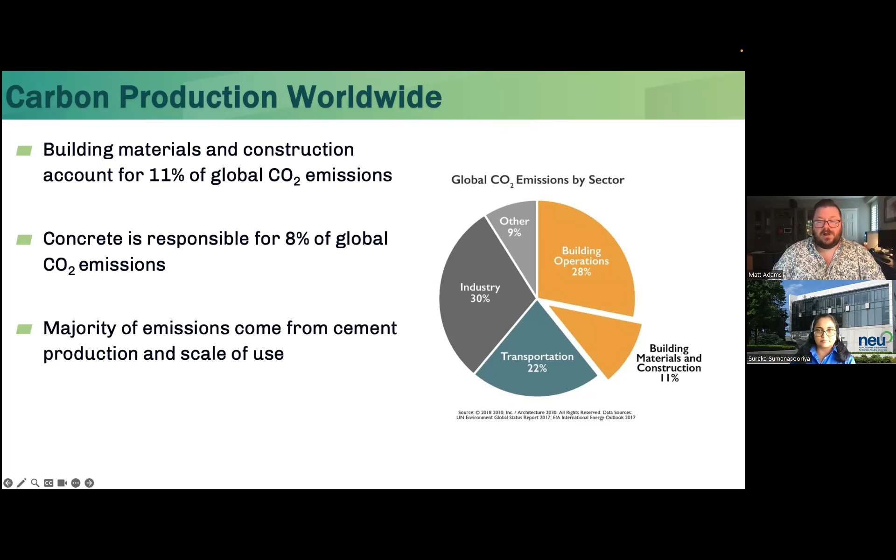So if we take a look, even though concrete's 8% of that total carbon emissions, in terms of relationships to other building materials, concrete has a relatively low embodied carbon on a per unit basis. It's much lower than some of our other building materials. With that being the case, oftentimes I get asked the question, why are we so concerned about concrete?

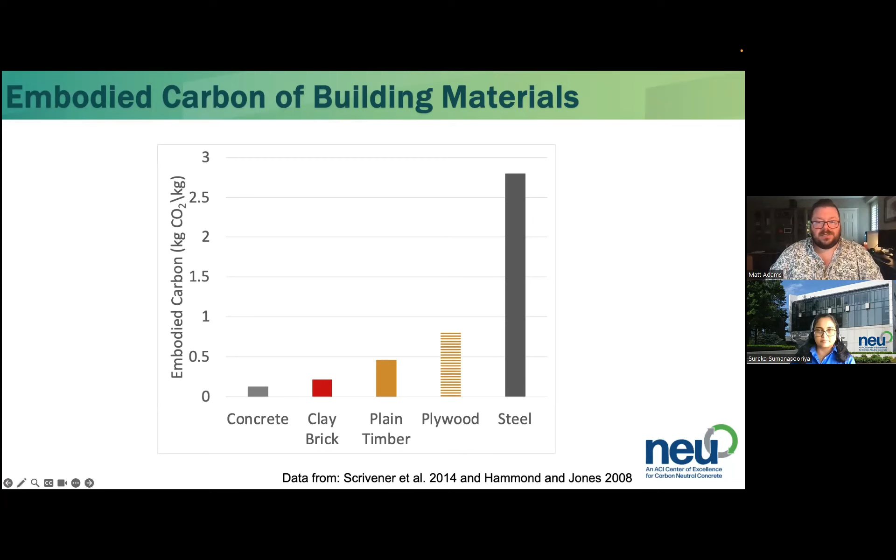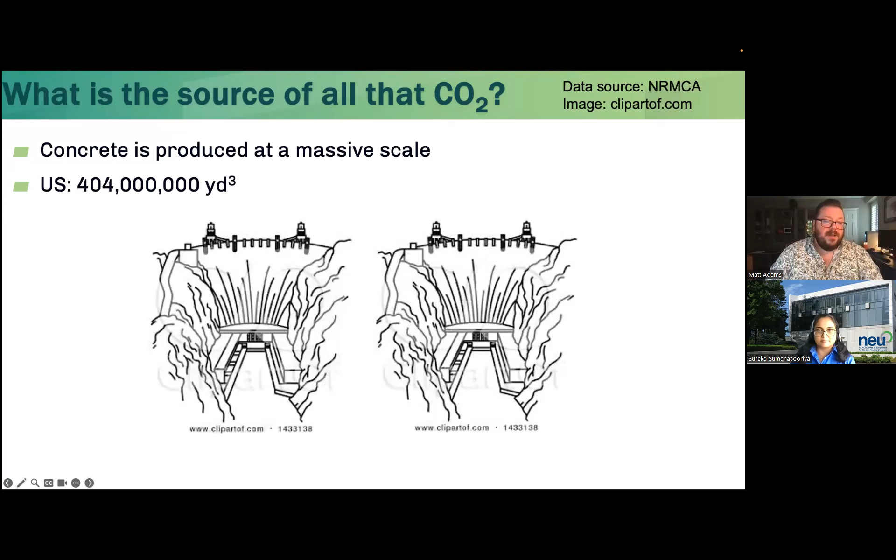Well, we produce concrete at a massive scale, much more massive than anything else that we produce in the world. In the US, we make over 400 million cubic yards of it a year. Just to put that into context, that is not one Hoover Dam, it's not 2 Hoover Dams, it's not 10 Hoover Dams, it is 615 Hoover Dams. So that's a lot of Hoover Dams that we construct just in the US alone.

And the US is certainly not the country that is doing the most new construction in the world, right? So we are just a part of that number. Globally, it's a huge number, the amount of concrete that we make. And because of that, all of the carbon that is produced, even though it's relatively small on the per unit basis, it adds up pretty quickly.

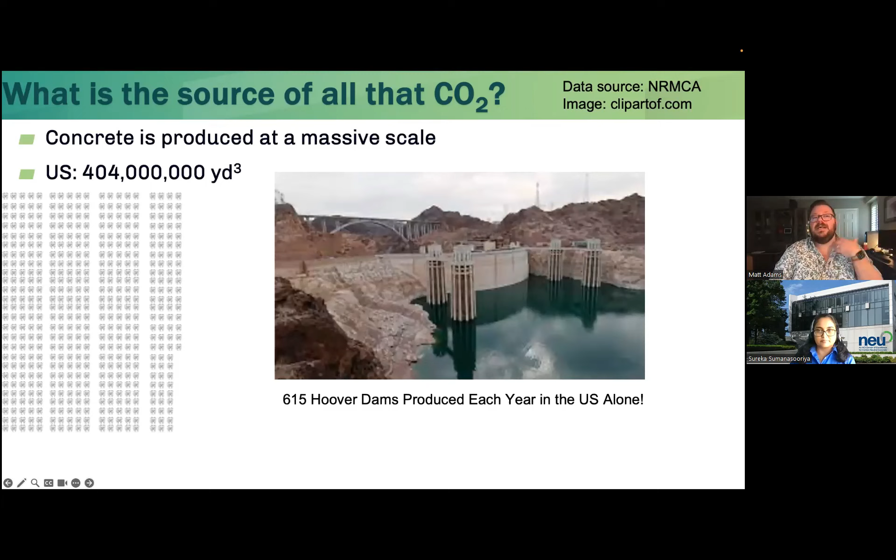So where's all of that carbon coming from? Greater than about 90% in most cases of the embodied carbon in a pure Portland cement mixture is really from the cement production.

This can be broken down into the quarrying, transport, and grinding processes, the process emissions, which are chemical emissions that come from the process of making the cement, and then thermal emissions, which are associated with burning the fuel to heat up the kiln for making cement.

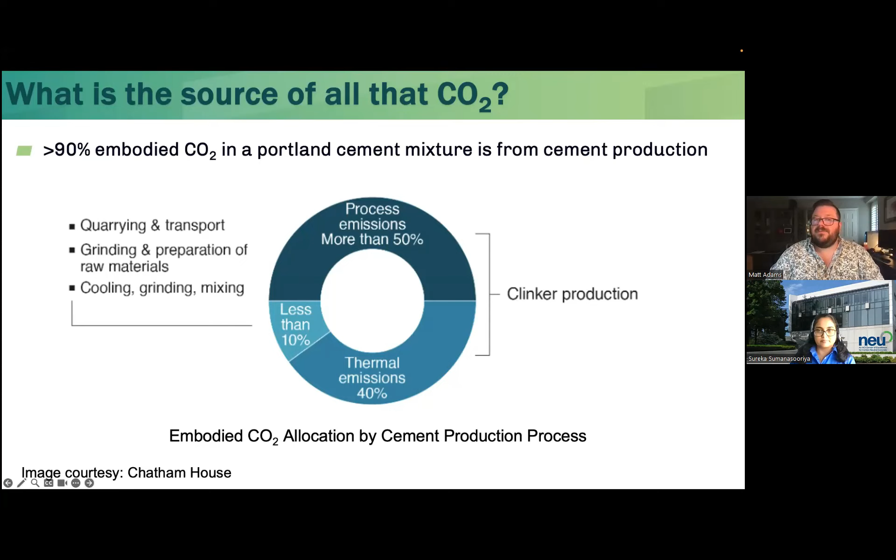You can see from this graph from Chatham House that more than 50% of the total CO2 we're producing when we make cement is coming from that chemical process. At the moment, it's not really avoidable.

If you're familiar with cement production, we make cement in a large rotating kiln, and we heat that cement up to about 1400 to 1500 degrees Celsius. At the end, we get clinker that we crush down with gypsum to form Portland cement. During that process, we release quite a bit of CO2.

First, about 40% is from the burning of the fuel source to heat the kiln. We've done a lot of work to make that more efficient, but at the end of the day you're still burning quite a bit of fossil fuels.

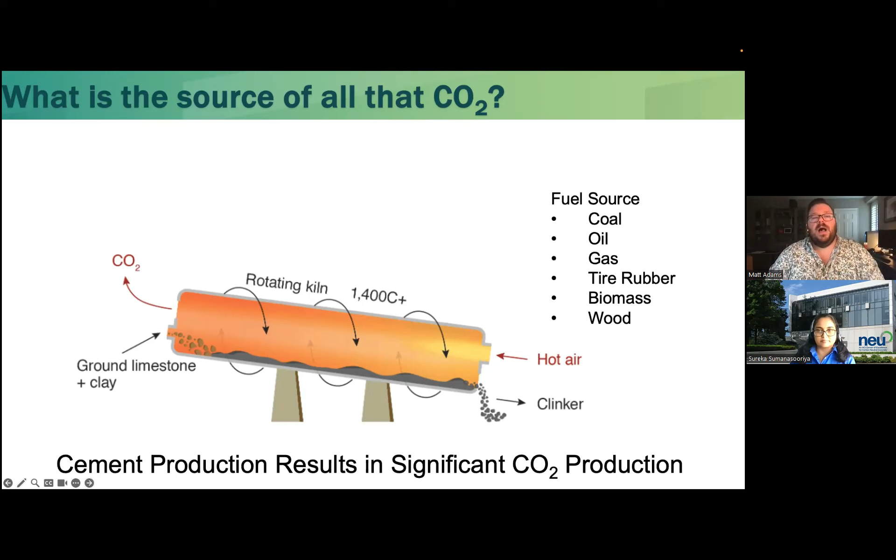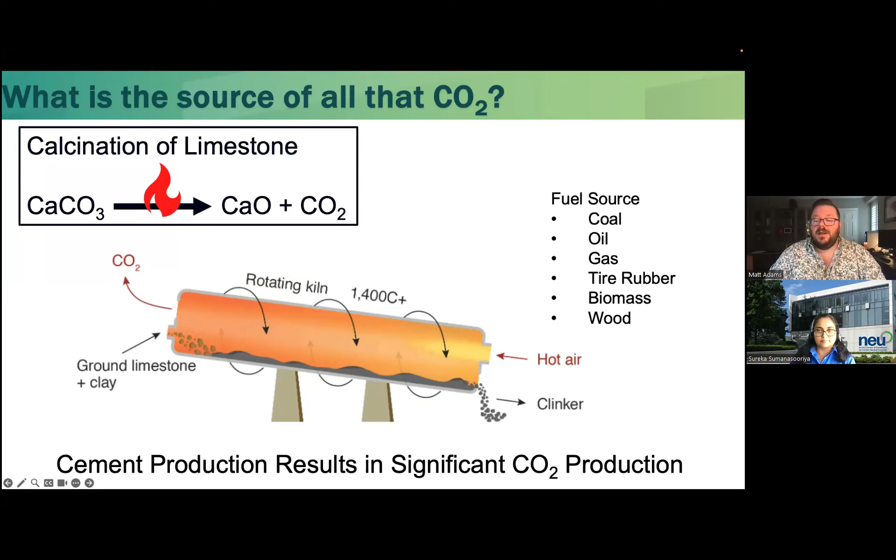But really the main source is from the calcination of the limestone. Limestone is a raw material we put in so that we can get calcium oxide, which is a main component of cement. When you burn that calcium carbonate, or the limestone, it drives off CO2 so you get the calcium oxide. Right now, in most cases, that CO2 is just being released to the atmosphere, and that is a huge source of CO2 coming from cement production.

There are a number of technologies for reducing the CO2 related to concrete. First are options for sequestering the CO2 into concrete, technologies like what is being sold by CarbonCure and Solidia, where you're actually putting CO2 into the concrete and locking it away. I'm not going to touch too much on that today.

You can reduce your total Portland cement content and your total cementitious materials content. We can try to reduce or capture CO2 production at the source. And then we can also try to minimize the carbon in our non-cementitious materials, so minimizing carbon associated with the aggregates and other processes in the concrete production process.

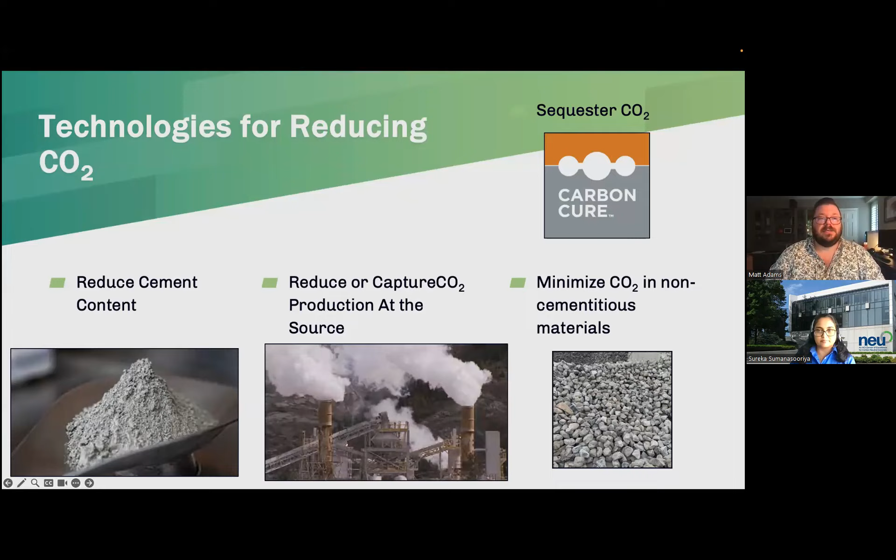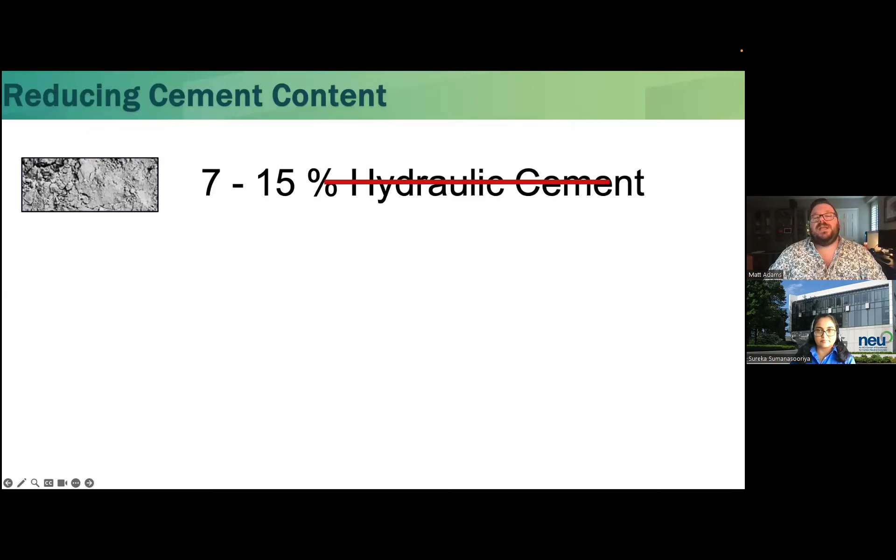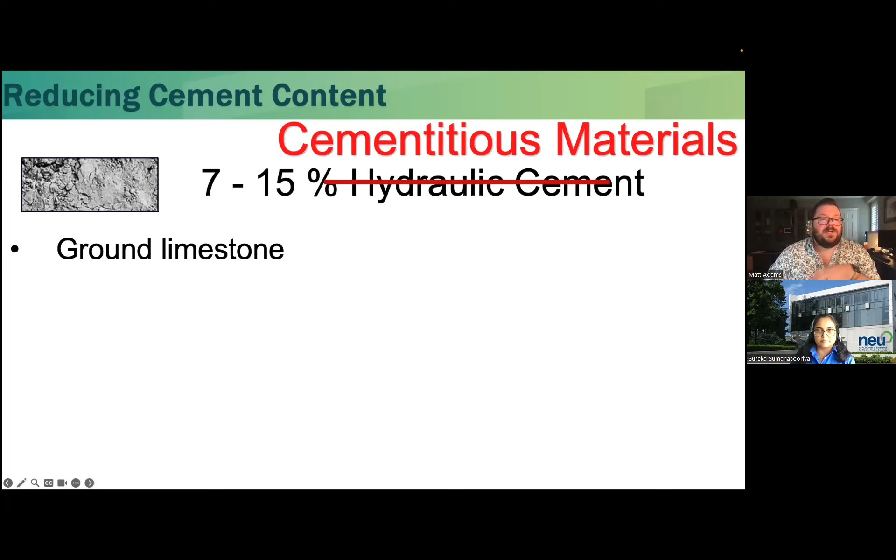So how do we reduce our cement content? The amount of cement in a concrete mixture is about 7 to 15%. If we can try to step away a bit from using all Portland cement, and think of it as total cementitious materials, we can start to include things with much lower embodied carbon, like ground limestone and common supplementary cementitious materials, though we know there are potential access issues for fly ash and slag on the horizon.

And then we have newer SCMs coming onto the market, like ground glass pozzolans and calcined clays. Not going to get too deep into what these are, but there are many options for trying to reduce the total amount of cement in your system.

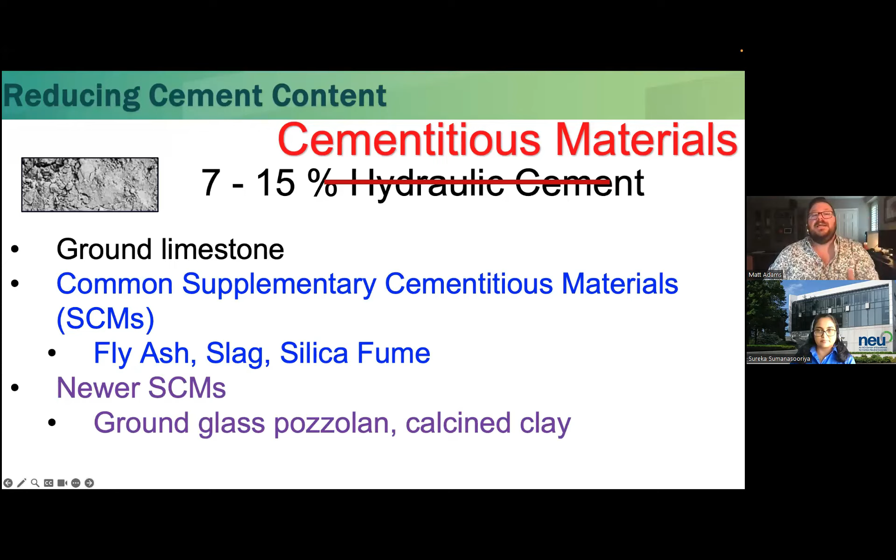We can also try to reduce overall cement content by improving aggregate gradation. Essentially, packing more aggregates into the space means you have to fill less of that space with cement. This is still a technology being developed in terms of the best way to calculate that packing, how you actually blend your aggregates, what the cost associated with it is, and how concrete plants actually do this at scale.

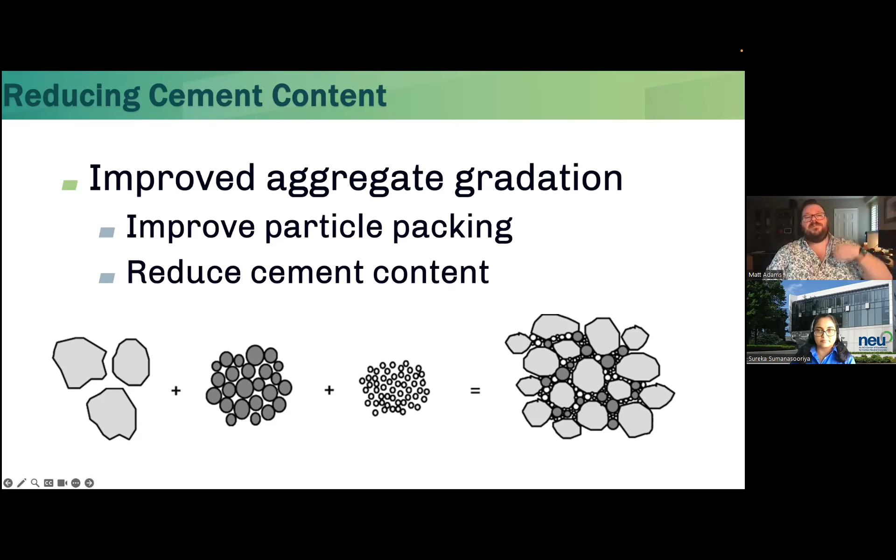Right now it's been done quite a bit in lab scale, but getting the concrete plants up to the next level is kind of another stage.

But really the most important thing for us is not to over design our concrete. Concrete strength is not a strongman competition, it's not about who is the strongest and the best. It's about making the concrete that you need for your particular application. We know that we can dump lots of cement into a system and get pretty high strengths, get higher early strengths with that, but we don't really need that.

You can get great strengths with more careful design. You can get everyday strength, 4,000, 5,000 PSI, with fairly low cement contents. So just trying to be more cognizant of the way we design our systems will really help.

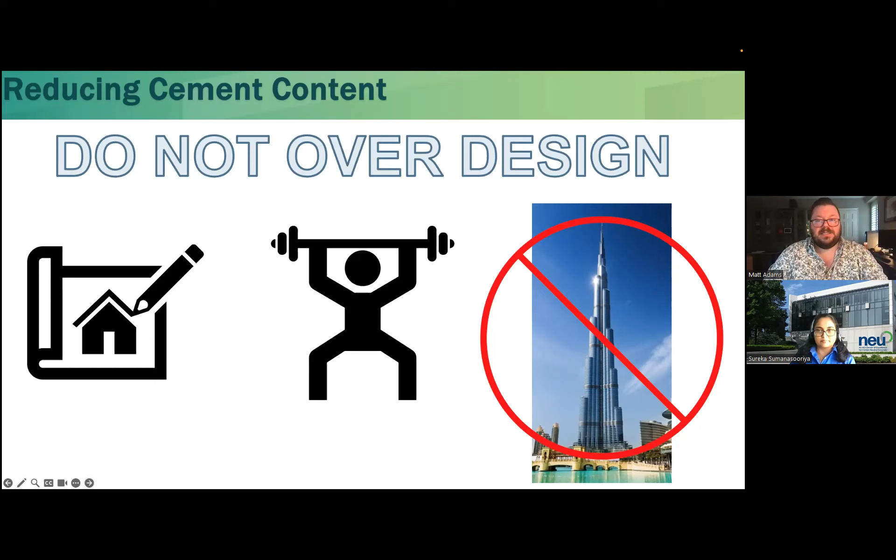Another tool being examined is reducing or capturing CO2 at the source. Modern cement plants are pretty efficient in terms of energy efficiency, heat capture, et cetera. There's always improvements to be made, but we've done a lot of work in that space.

But in terms of trying to capture the CO2 coming out of the kiln, particularly from the breakdown of the limestone, there are technologies in development, but likely retrofitting plants is going to be incredibly costly, and that cost will get passed down to the consumer in some way. So there's a limitation to how much that can happen based on how much people are willing to pay for the cement.

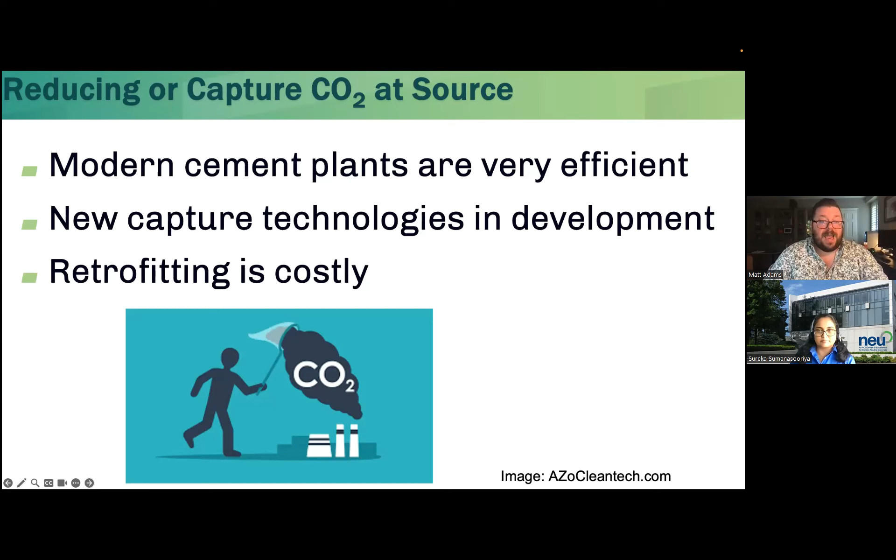You can try to minimize CO2 from other components such as the aggregate, but these have minimal impact on the overall CO2 in the system, because the amount of CO2 associated with making aggregates is relatively low in the first place. About 90% of the CO2 embodied in concrete is associated with the cement content, so focusing on how to reduce cement content and improve the other materials will get you better gains.

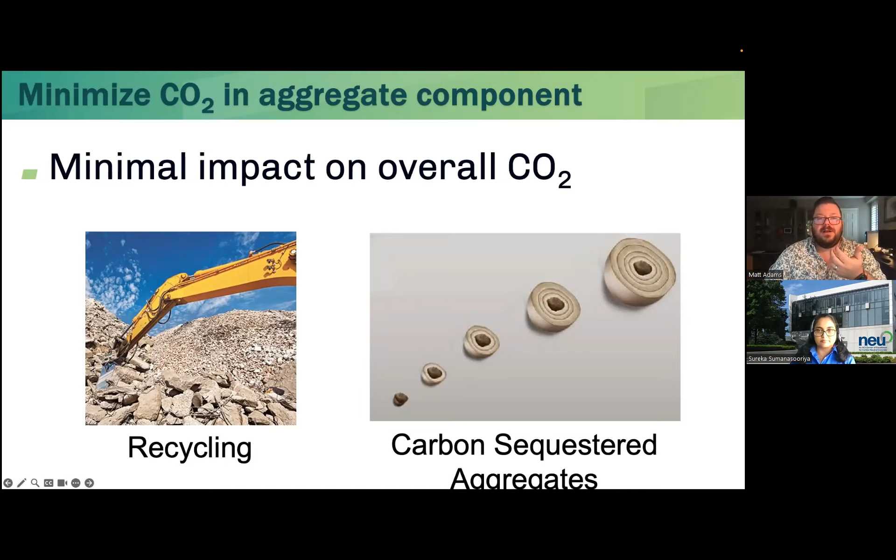So we have all of these technologies. What's the barrier to implementation? Why have we not used these more effectively?

First, there's always a fear of cost. Anytime we're looking at something new, people are worried about how much it's going to cost. Not everything that we do has an increased cost with it. Some of the technologies do have increased costs associated with them, but not all of them do, particularly ones we've been using for a while—the cost is really not significantly different. So we have the ability to make low carbon concrete without significantly increasing the cost, and this has been shown by many agencies that have started to use it.

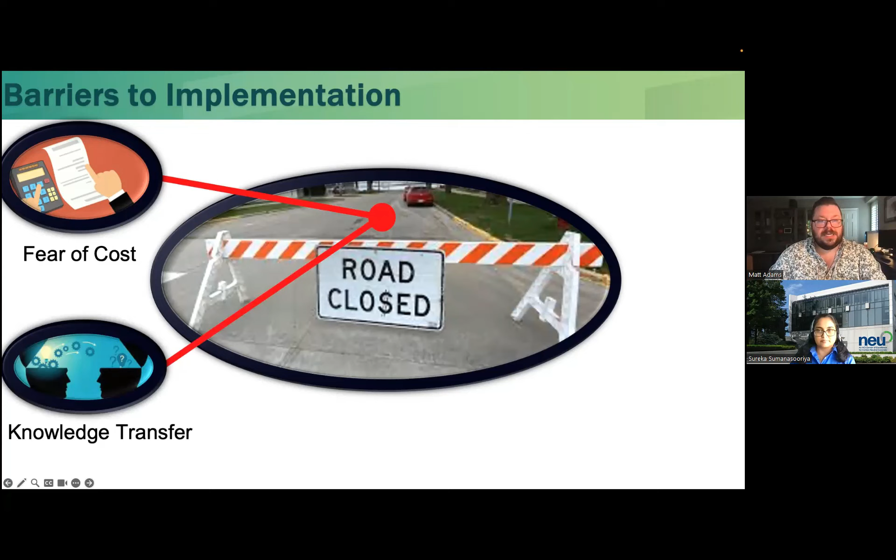We do have issues with knowledge transfer. A good example is a town in upstate New York that wanted to start using low carbon concrete, referring to it as green concrete. They went to their local concrete plant, and the plant said, 'Why would you want to dye your concrete green?' So there are these miscommunications and misinformation, and then there's just folks who don't have the base knowledge.

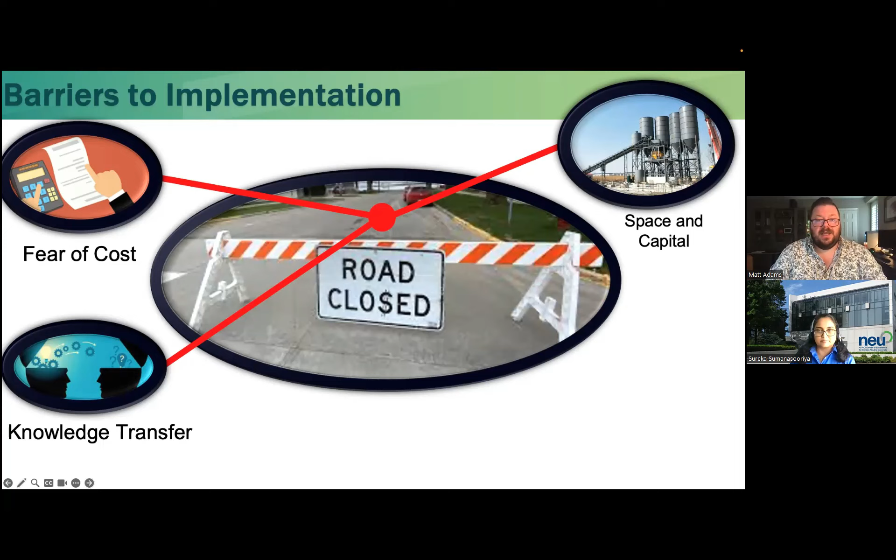ACI, NEU, educators—we can start to develop more easy to access knowledge transfer tools to get that information out. Space and capital at concrete plants is a real difficulty. A lot of concrete plants, particularly in urban environments, sit on very small parcels of land. So when you ask them to introduce new materials, it's not just about learning what that material can do and how to use it, but where do you put it? Do they have space for another silo of cementitious materials, or a third size range of aggregates? They don't always have that space, so we need to provide capital to expand or come up with new storage methods.

Liability is always a concern, particularly in construction when we're moving into new materials. For low carbon concrete, there isn't a lot of national level guidance—we don't have a national level model building code. So when it comes to best practices, contractors are often nervous to implement things because they don't have national level proven technologies to fall back on, and they don't want to take on the risk themselves in case something goes wrong.

And then political will is always an issue. Particularly for public projects, the rest of these issues can really be solved with political will and putting in the right policies and funding. You need legislators and policymakers who are interested in creating more sustainable concrete, but who are also willing to look at all these barriers holistically and figure out how to drive them—how to keep implementation costs off the contractors and concrete producers, and make it a real community effort. So those are some of the main barriers to implementation.

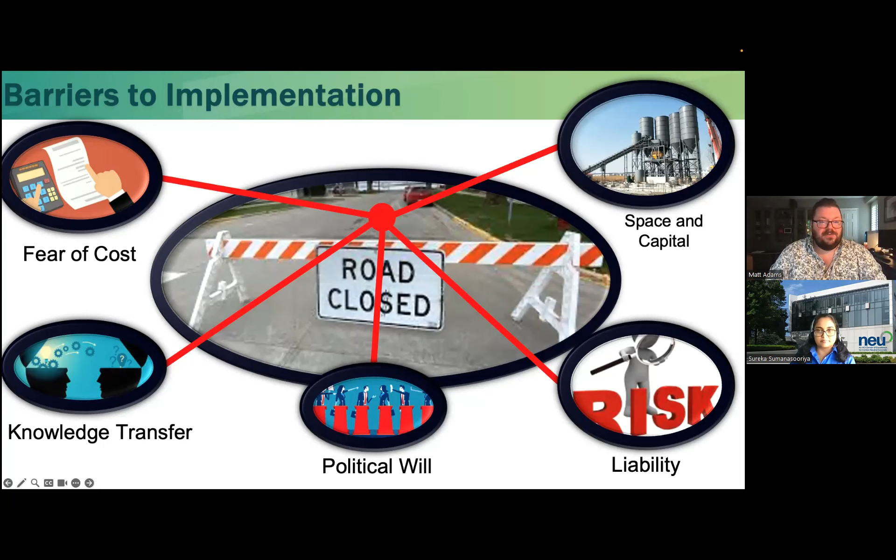We've seen a lot of policies start to get implemented around the country, some more successful than others. I want to take time to talk about each of the main policies that have been put out. This isn't all inclusive, since new stuff comes out every day from different jurisdictions, and it's difficult to keep tabs on all of it. But some of the first policy came out—and I'll start by saying good policy can save the world, bad policy is just ineffective. We saw a lot of policy work start at the local and state level, really with a lot of non-mandatory resolutions.

So when you're talking about a resolution, it's usually some legislative group standing up and essentially making a statement, saying we think this should happen, but there's no requirement behind it. There's no enforcement, there's no incentives. It's just, hey, we think you should do this.

Some of the first low carbon concrete policies that came out really focused on promoting the use of carbon storage in concrete, so the use of things like CarbonCure or Solidia, et cetera. The first few that came out were from the state of Hawaii, the city of Austin, and the US Conference of Mayors also made a resolution on this. These policies were really mainly pushed and lobbied for by some of the private companies.

The resolutions weren't bad necessarily, they just didn't really have any teeth to them, so they didn't really get that effective. And for a lot of these technologies, you really need special equipment, so even if a city says we want this, was it available nearby? That was a problem. This is where we really start to see that these resolutions are good-natured, kind of get people interested in the idea, but they're really not moving us forward.

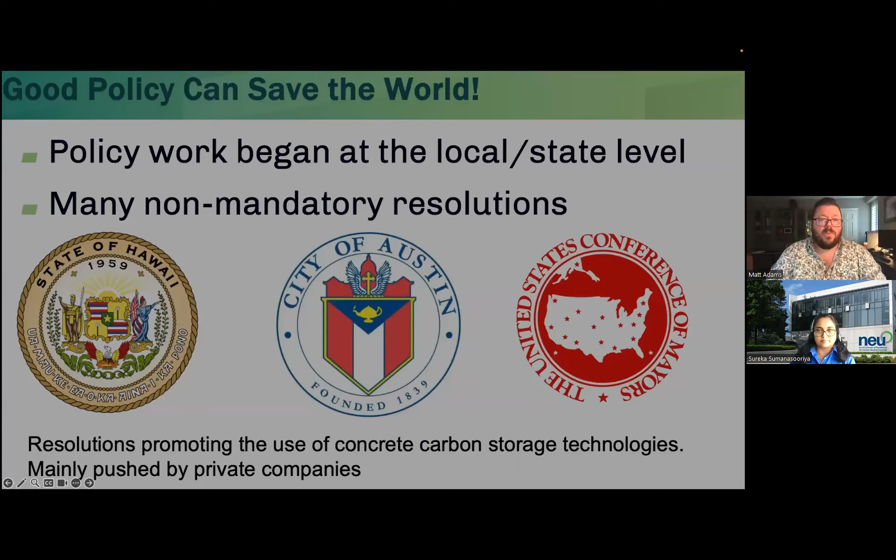There were some resolutions that were taken that were very successful. One example is one that was put together by the village of Hastings-on-Hudson. If you're unfamiliar with New York sort of jurisdictions, villages are basically sub-city level government, so the village of Hastings is part of a larger city area up in upstate New York. They put together a resolution that ended up being very effective.

They were able to have a lot of projects come out of this that have utilized lower carbon concrete systems, starting at the very small scale with probably a 25-foot long retaining wall - that was their pilot project. They've now scaled up. They have it in an elementary school, they did a massive sidewalk project, and basically all new concrete being put in the city is following low carbon concrete technologies.

It's also expanded out of Hastings to most of the surrounding villages and towns, and starting to get traction through a broader region within New York. This resolution was pretty, we would say, successful because it had the impact of accomplishing the goal of having more low carbon concrete, not just in that town, but in the area.

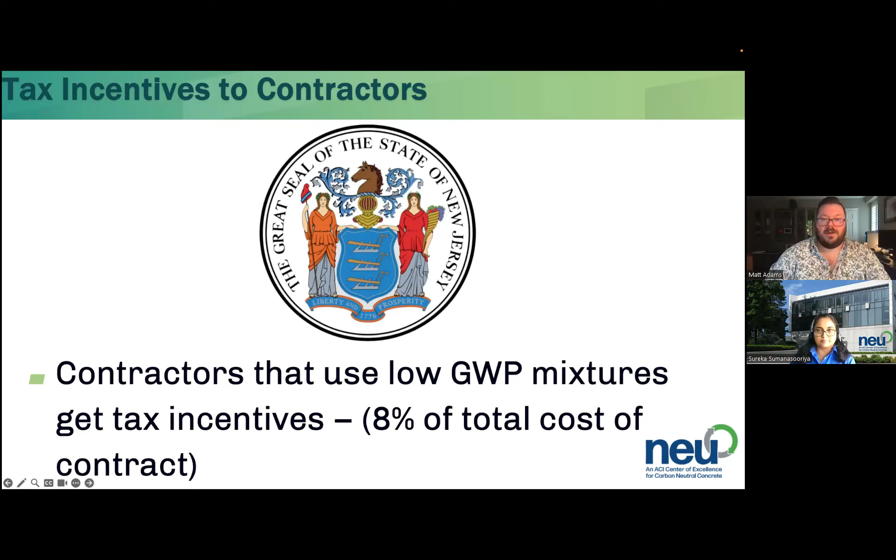The next ones are really starting to set limits on the total global warming potential allowed in embodied carbon concrete, and also limits on the total amount of Portland cement in a system. The first group to really implement this was Marin County in California, just north of San Francisco. For all public concrete projects in unincorporated areas of Marin County, they have limits on either the total cement content or the total global warming potential.

Those limits are based on concrete strength—the stronger the concrete, the higher the allowance of cement or global warming potential. Port Authority of New York and New Jersey also just released a new specification that both limits cement content and requires calculations of GWP. Those limits were really based on internal studies of global warming potential.

For Marin County, they did a study of concrete made locally, determined the global warming potential of that, and set their limits based on that. For Port Authority, their limits were set based on their own internal data. They came up with what those limits could be, what they felt was going to be achievable. And now those are requirements for all concrete in those jurisdictions.

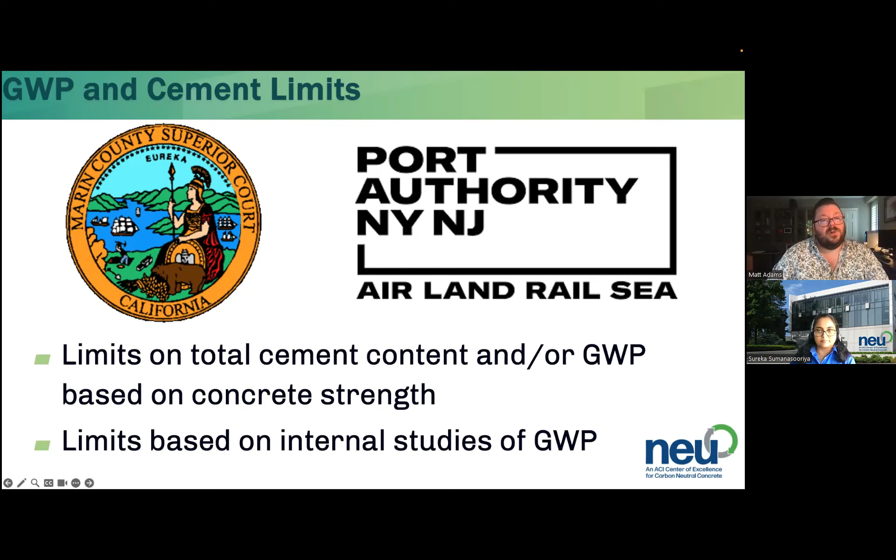The state of New York just released their new limits—I believe it was on Tuesday that they released this information. They're following similar ideas to Marin County and the Port Authority, limiting the total global warming potential based on the strength of the concrete. The limit they've chosen is 150% of the NRMCA regional average concrete global warming potential for the Northeast region. If you're unfamiliar, the National Ready Mixed Concrete Association has come up with averages for global warming potential for concrete based on regional averages in the US. This is a really great benchmarking tool that they have developed.

There are some limitations to it. The data, while very good, is somewhat limited. So while this is a great start, we have a lot of work to do in this area of trying to really determine what those benchmarks, what those baselines should be. What is out right now is kind of a first pass, based off of limited data sets.

In the world of concrete, we do have what I like to refer to as a data problem, in that it's not that we have too much data, it's that we really don't have enough well-organized and easily accessible data. So we need to really step up in the community in data sharing so that we can get really good answers and information.

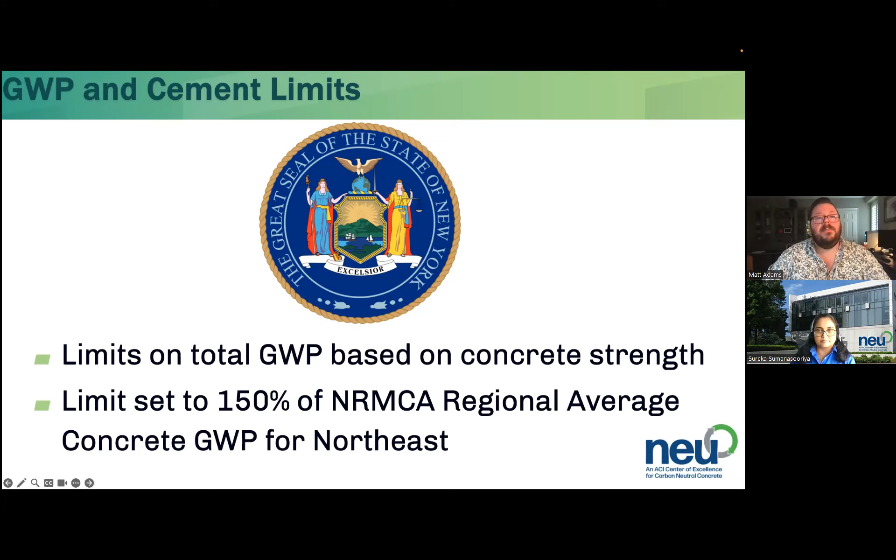How do you actually calculate your GWP? What limits should you use? What makes a low carbon building material hasn't really been determined yet. So there's still a lot of work to be done there, but that is coming, and they are in the process of figuring that out.

And so what all of this comes down to is that there has been a lot of policy put together, and it's kind of all over the place. There's different ways of calculating the GWP. There's different benchmarks that have been set. There's been different limits that have been set. There's been different ways to incentivize the use of the material.

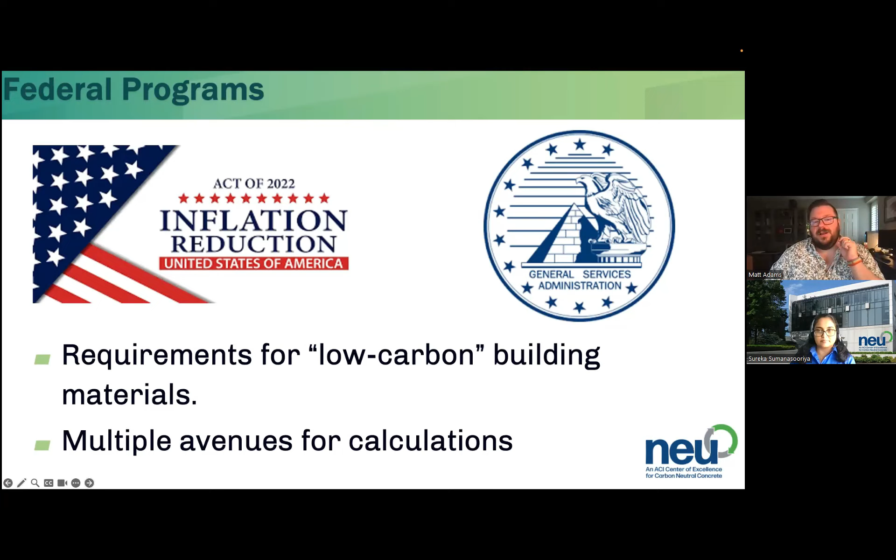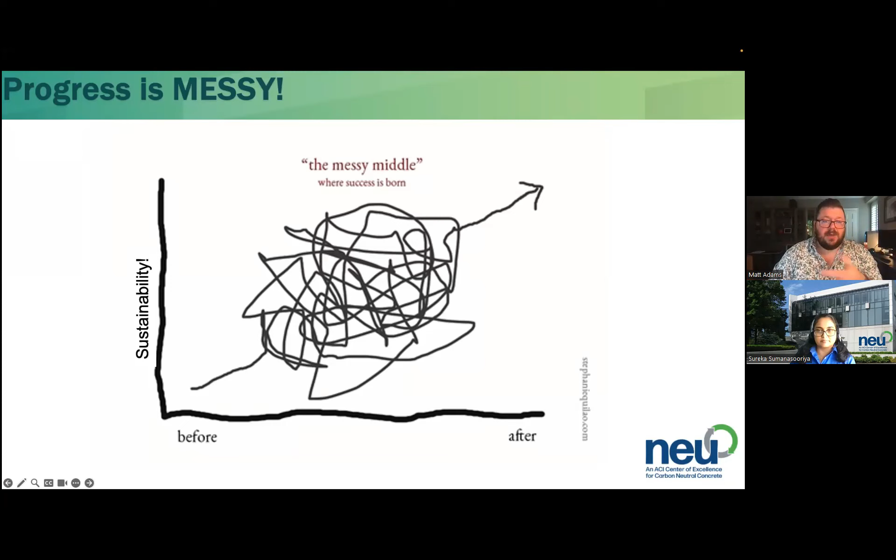And so out of this, we are at a point where we really need to develop national level building code and national level model building code language and tools for getting us to low carbon concrete that jurisdictions can adopt, and we can have a consistent way of calculating global warming potential and calculating limits across the US and really around the world. So that national level model code guidance is needed.

There's a few things that we really need to sort of decide. How do you determine the global warming potential of the concrete of your building? What are the best practices there? What's the best way to do this? How do you calculate it? What limits do we set? What should be the limit on the global warming potential? What benchmarks should be used? How do you calculate those benchmarks? These need to be determined.

And then the big question that comes up is, how do these limits interact with life safety code? The question that I have seen come up most often when talking with legislators and contractors is, how do I make sure that I meet these requirements without impacting life safety? How do I make sure that my building isn't going to fall down?

Engineers that work in this space know it's not that hard to meet life safety requirements while getting to low carbon concrete. But folks who are not well educated in this area have a lot of doubts. And basically what we know is that you follow the life safety code, that comes first, and then you can implement the provisions of low carbon concrete within that. Where you have a conflict, the life safety code is going to control. That always comes first.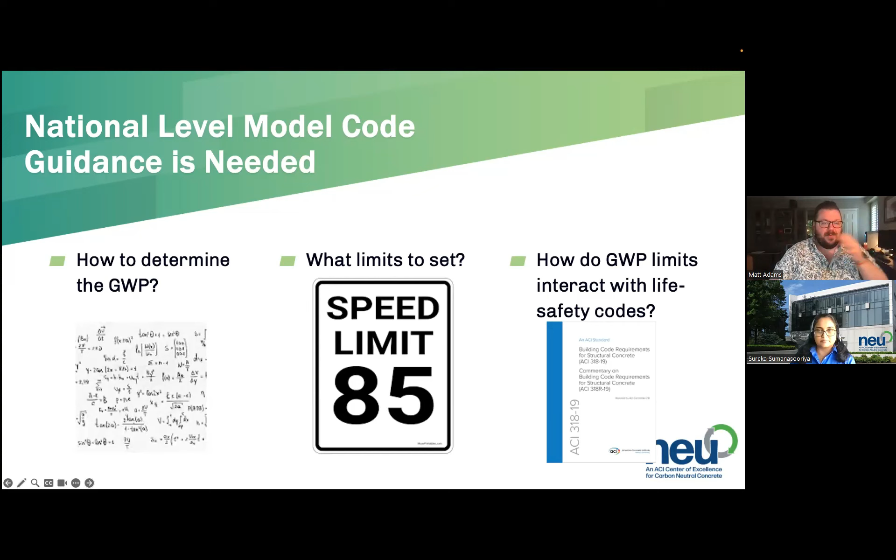And so to try to determine all of this, try to come up with a code that meets these questions and myriad other ones that fall under each of these headings, ACI Code Committee 323 is here. We're here to try to save the day. This committee has been put together recently. Our first meeting was in April of this year, to try to make sense of everything that's happening nationally and come up with model code language.

So like I said, we first met in April. We have a very strong cross-section of experts in low carbon concrete, concrete materials, carbon limits, legislation and policy, and code writing. Right now we are on track to release this code likely somewhere in mid-2024. So we are hoping to have a fully usable model building code for low carbon concrete next year. We are on track for that. We have some draft language that we are in the process of polishing up and cleaning up, and then it will go for approval to the various groups above our committee that need to approve it.

But really, how we develop that code took us some time and a lot of conversations. So when you go to develop a low carbon concrete code, there's a path that the code needs to go through to actually get those answers.

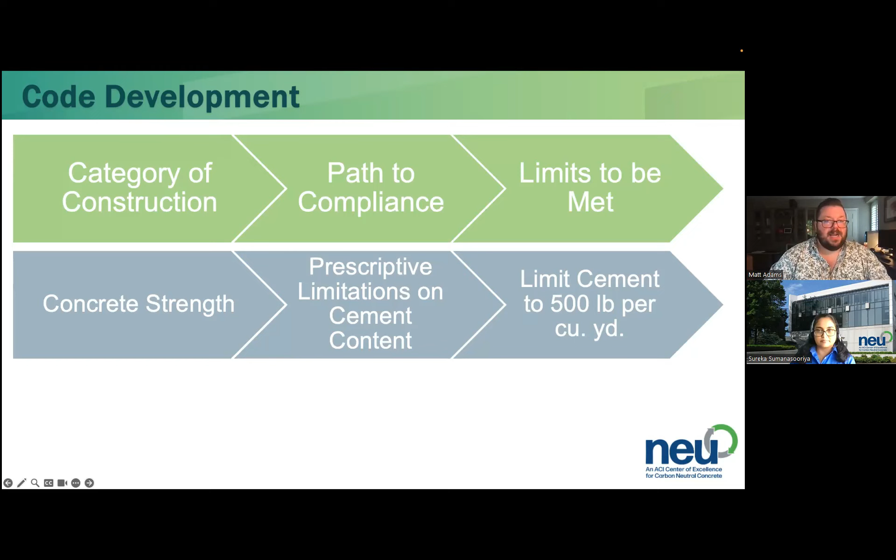So really the way that we're moving is to look at type and size of construction as our categories, and then a path for determining the global warming potential of your mixtures, and then putting limits on the total global warming potential based on how big your construction project is. This is the path that is most likely to be the most effective when creating a code.

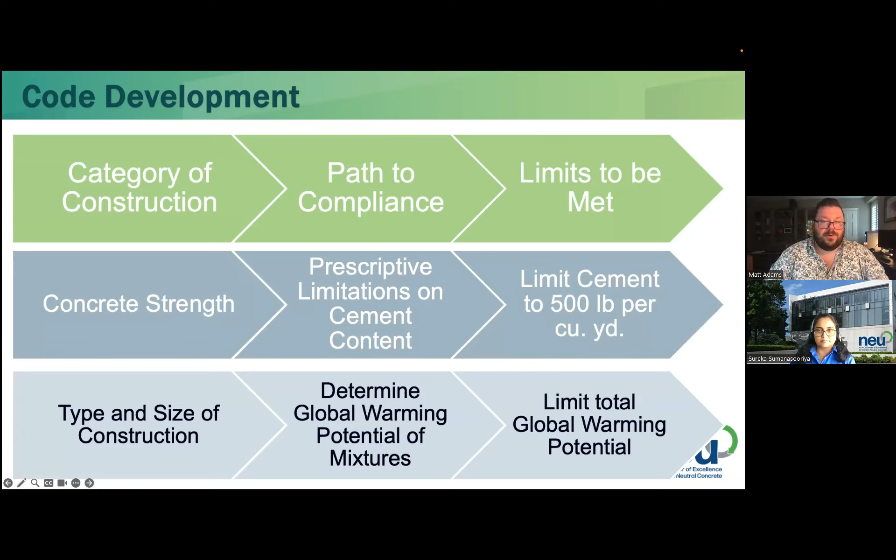So for our code, the likely system - and I say likely because we haven't finished it yet - but this is what we have through research and discussion, what is likely to work well. In terms of categories of construction, we're breaking things down into types, so bridges, pavements, buildings, etc., and then how large of a construction project it is. Based off of the size of your construction project, you will have different limitations set forward.

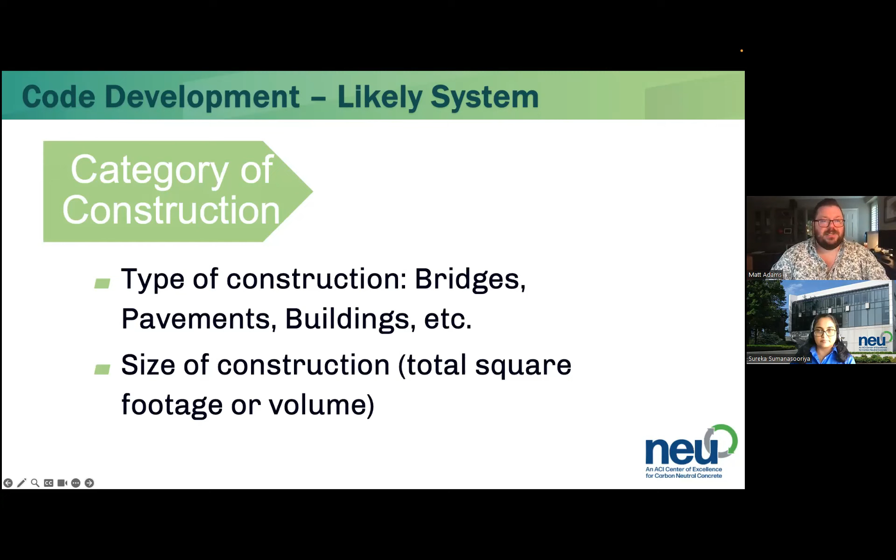The path to compliance for this is to determine the global warming potential for each mixture. The easiest way to do that is by getting environmental product declarations created for each of your concrete mixtures. Moving forward, we're hoping that more and more concrete companies start to avail themselves of developing EPDs so that they can truly know the global warming potential, the embodied carbon, of their concrete mixtures.

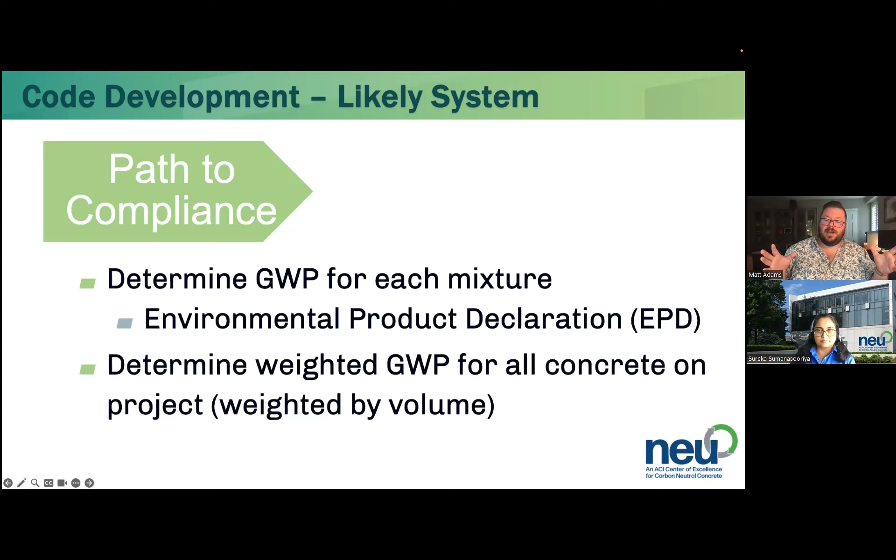Once you have that for each mixture, you can essentially create a weighted global warming potential for all of the concrete in your project. So even though you might have some concrete with a high global warming potential because you need high early strength for removing formwork in one area of the project, you might also have some concrete for a sidewalk that has a relatively low global warming potential. By weighting those together, you can get a good average GWP for the whole project that will meet your limits.

And then setting our limits will be based right now on the NRMCA regional global warming potential benchmarks. So we are having our benchmark GWP - the GWP that we want you to compare against will be those NRMCA regional averages.

But within the code, jurisdictions that implement this code can also use localized data similar to what Marin County and the Port Authority have done. So you can actually go and create your own regional benchmarks and use those. That would be best because each region has different requirements for where they can get their materials from, transportation costs, and what materials are actually available.

But if you don't have the resources to do that, here we've got the NRMCA regional benchmarks, which are available, and hopefully those will just continue to improve in quality and knowledge. Then we'll set a limit on how much of that benchmark you can meet. We have some ideas for what the limit will be, but I don't want to talk about that until we finalize the code. We're getting there.

So our new code that we are developing is likely to follow this process. When we think of a code, we might think of 318, which is hundreds of pages. This is going to be right now a 25-page code. There are lots of things that need to be considered for sustainable and low carbon concrete, like whole building life cycle analysis.

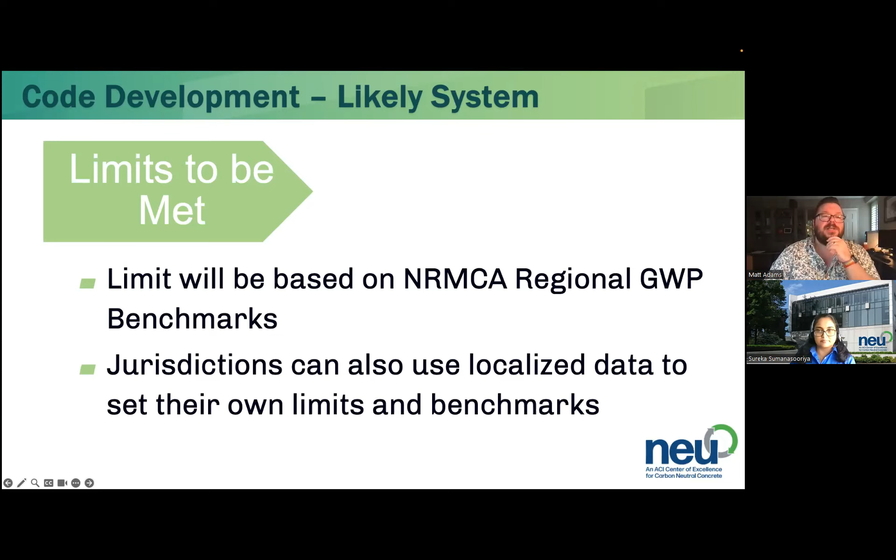So with that, that's really the end of my presentation. We're getting there. Hopefully next time I can come back to NEU and give a full presentation on how this code works, and hopefully that will be next year sometime.

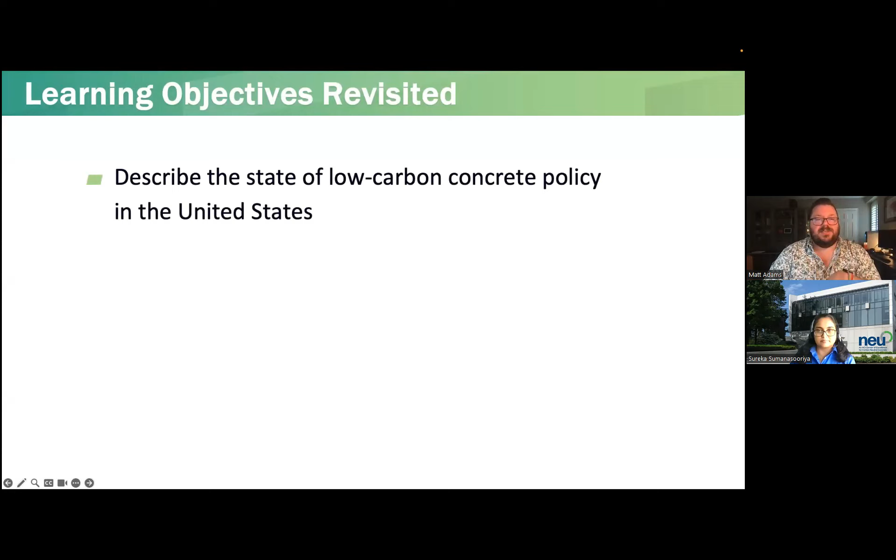But just to kind of revisit what we went over today, hopefully from this you can sort of describe the state of low carbon concrete policy in the US, discuss the need for model building code language. We really need to have some model language that people can use, because right now we're a little bit all over the place. And then describe the current state of technology for low carbon concrete. There's lots of options out there for us to use.

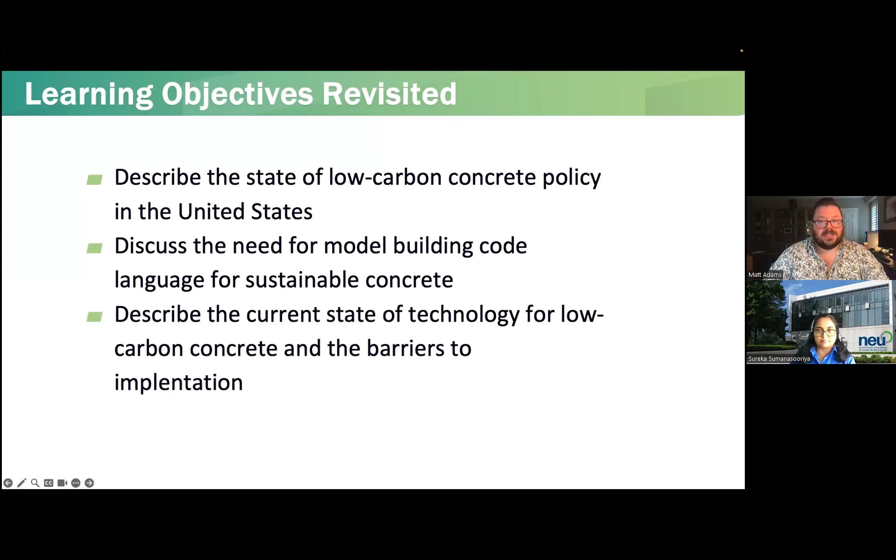And before I say thank you and walk away, I just want to acknowledge my research group at NJIT, along with Dr. Bandelt and a whole group of PhD and master's students and undergrads who have helped complete a lot of the technical research that we're working on. My partnership with the Rockefeller Institute for Government, and then the ACI 323 committee members who have really put together this code. So Dr. Andrea Schokker, who is ACI staff, who's been our staff secretary, has done a lot of great work to help us out. Dr. Chris Ferraro, who's our vice chair, has helped make sure the meetings go smoothly. And then our committee members who have just been amazing at staying on task and getting us where we want to be. And then ACI and NEU staff who have helped us on the back end, and all of the different groups that have funded my research over the years. So I just want to acknowledge all of them.